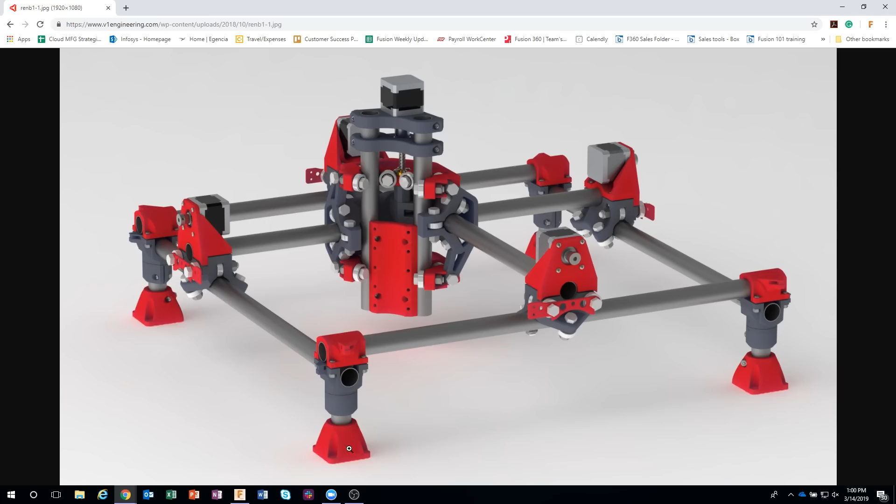We're going to be talking about lofting. I'm going to show you how I went about creating this part, which is actually from a mostly printed CNC machine. Let me bring up a picture of it. One of you on a previous live stream mentioned this, and I thought, okay, I've got to make one of these. So we're going to be creating one of these feet you can see in this image.

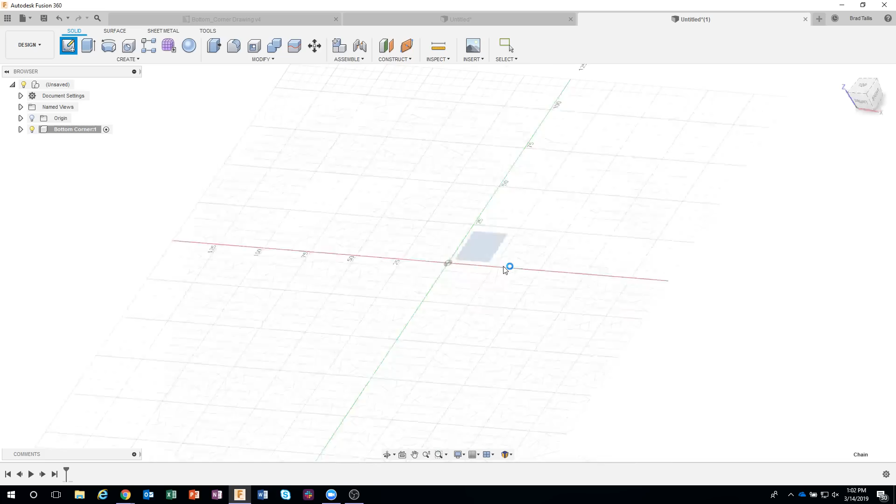Okay, then I'm going to start by creating a sketch, and I'm going to do the top plane. So I'm going to start by drawing my rectangle - I'll click on the rectangle command. If you don't know this already, it puts the options of the different kinds of rectangles over here in your sketch palette. For example, if I do C for circle, you'll see all the different kinds of circles. So R for rectangle - I can see my 2-point, 3-point, and center. I'm going to go ahead and do a center rectangle.

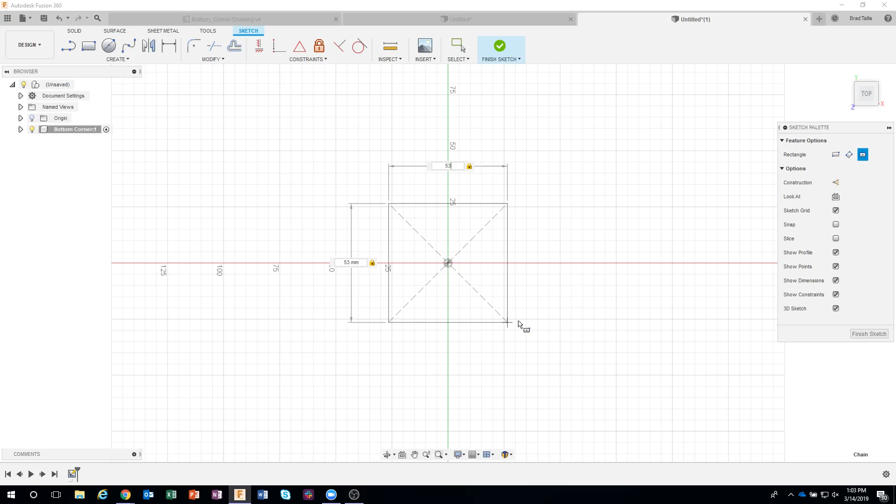Now all of the dimensions I'm typing in, I'm getting off of the drawing, and I'll switch back and forth between the drawing every once in a while. It says it's 53 millimeters square, so I'm going to type in 53 in both of those, and we can see it created a rectangle. Just for your reference, right here it says 53 with a little square icon, meaning it's 53 in both the horizontal and vertical dimension.

Now in a previous live stream, I mentioned that I keep my sketches fairly simple - for example, I don't do fillets in 2D, I do fillets in 3D. But in this case, we're actually going to be lofting from one profile to another, and I need my profile to look the way I want it to be before I do the loft command. So I am going to actually use the fillet command.

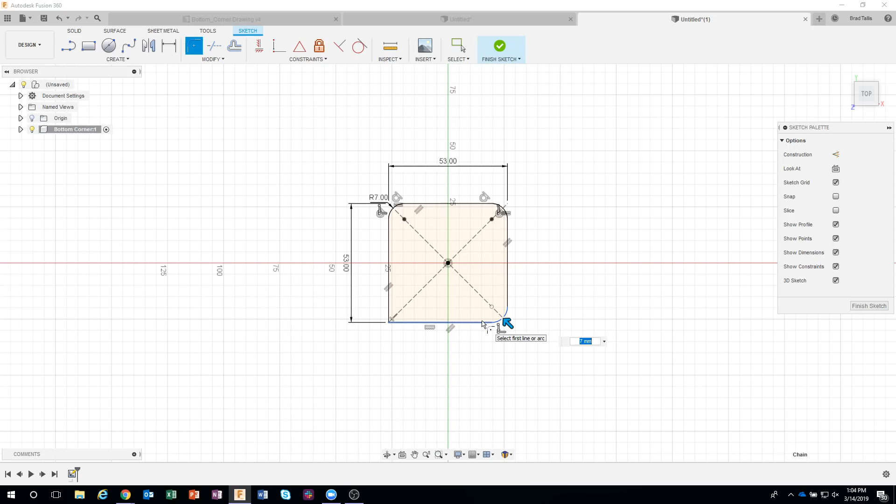So I'm going to say fillet, select my two lines, and the fillet according to the drawing is 7 millimeters. I'm just going to hold down my control key and continue clicking around - and of course I get a phone call. Let me go ahead and select these other lines here, so I'm doing a radius of 7 all the way around.

And now I'm done, I'm going to finish my sketch. So what we basically did there was we drew the overall shape of the bottom. You can see how it's a square bottom with filleted edges.

The next thing I want to do is draw the shape of the top, which in this case is just a simple circle, 35 millimeters in diameter. I'm not going to worry about the hole through the middle quite yet, we'll come back to that. I'm basically building the overall shape.

Okay, let me jump back to the drawing. I need to draw this circle at the correct height, and we can see the overall height is 40 millimeters. So I need to create a sketch that's 40 millimeters from my rectangle.

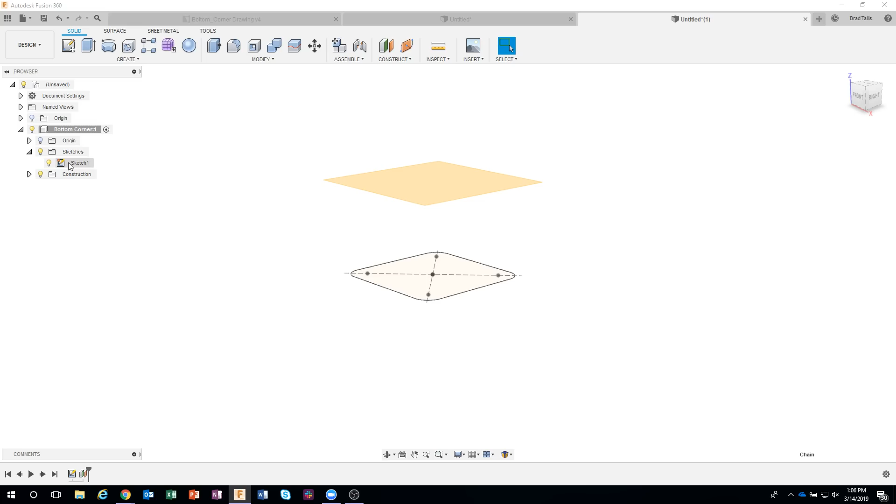To do that, we're going to use a construction plane, and the very first one is called offset plane. It allows me to pick a plane, and then I start to drag, and you can see how it's basically going to create another piece of paper that we're going to sketch on at a particular height. In this case I want it to be 40, so I type in 40 and say OK. If I expand open my component here, we can see our sketches, and we can see this construction.

So what's cool about this is I can just select that plane. I click on it once, right mouse click, and it shows me the commands that make sense. I could create a sketch on that plane, or I could offset another plane from that.

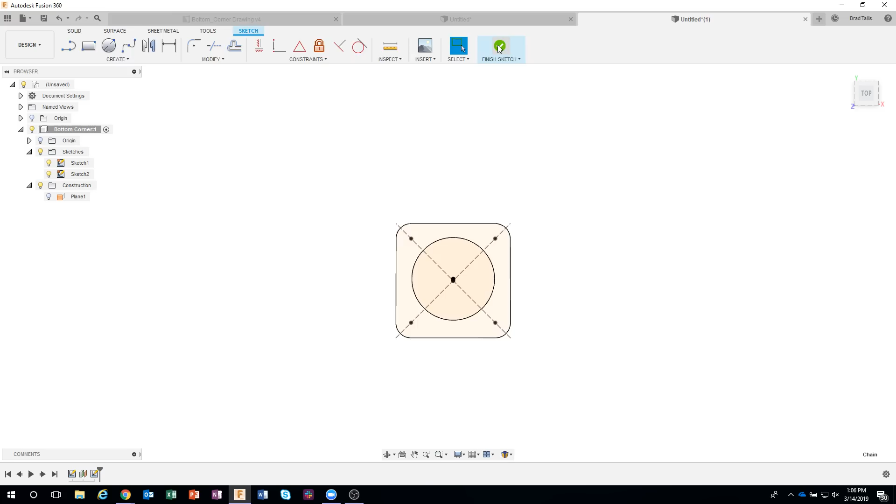But in this case, we're going to say create sketch, and I'm going to draw my circle. I started at the 0,0 because this is going to help me out. I'll just click there, and now I can type in my diameter of 35. If I say finish and rotate, we can see that circle is now above this other sketch.

Now I'm going to talk about the loft command, but you're going to see some issues happen, and we're going to come back and continue with our sketch. Under the create menu, I'm going to pick on loft.

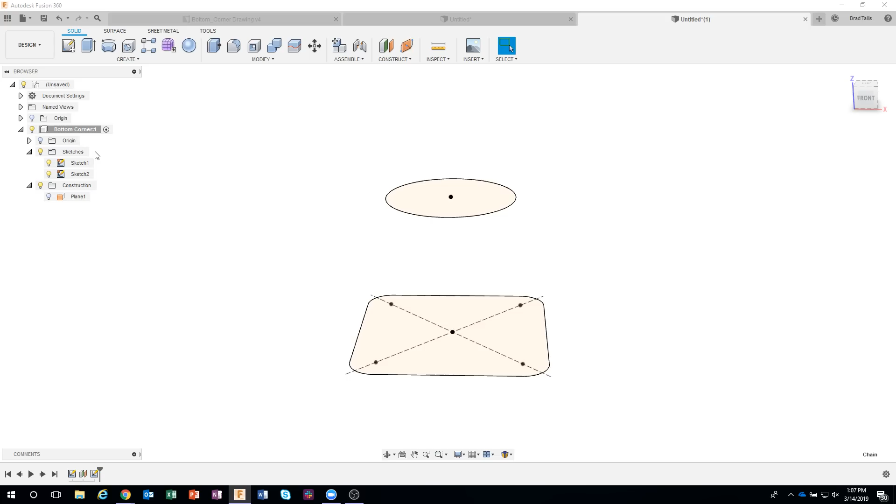What this allows you to do is to specify which profiles you want to loft. You'll notice as I get near this profile, it highlights. I'm going to click on that one, and then I'm going to click on this one. You can see that Fusion did what I wanted it to — it took this square shape with rounded corners and moved it up, or lofted it, to this circular shape.

Now, the problem with this is, if I look at it right from the front, it just went in a straight line. In our example, it's got a curve to it, we've got a nice transition, and in this case we don't see that. That's why we're going to actually have to add in some guide rails. This allows you to tell it to go from one shape to the other, but follow a rail — kind of like a train has to follow a train rail. The loft is going to have to follow that rail.

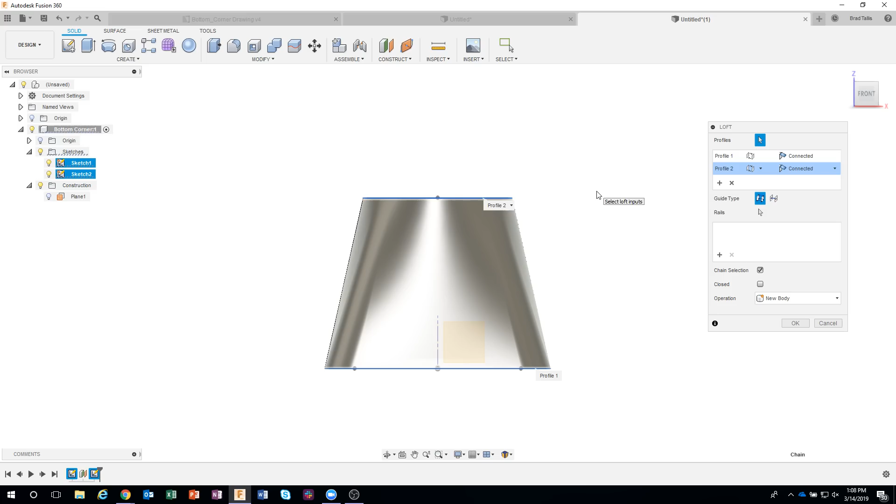Now I'm going to show you some cool commands in here. Up at the very top you can see the different profiles, and it says connected. But I can also say direction, and notice what we get — we're actually controlling the weight of this loft, so I can sort of simulate that curved surface. So if you don't really care too much about the exact shape of this, you just want it to go from one shape to another and kind of curve, you can use direction instead of connected.

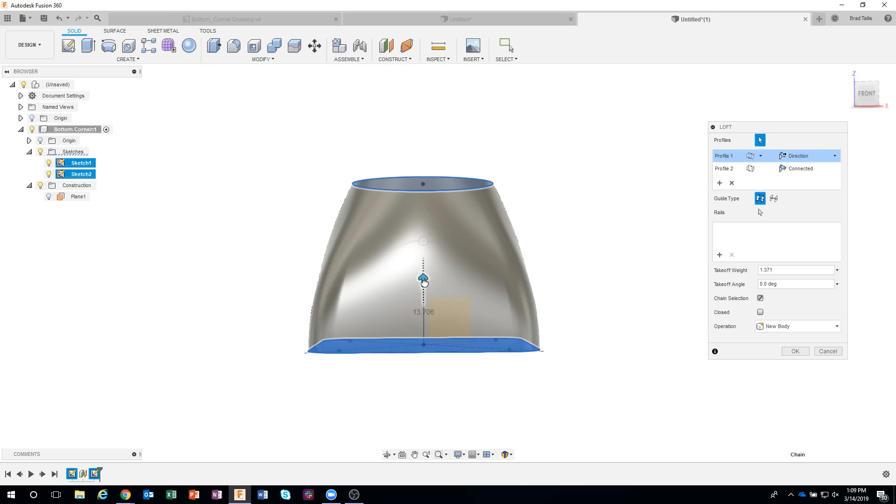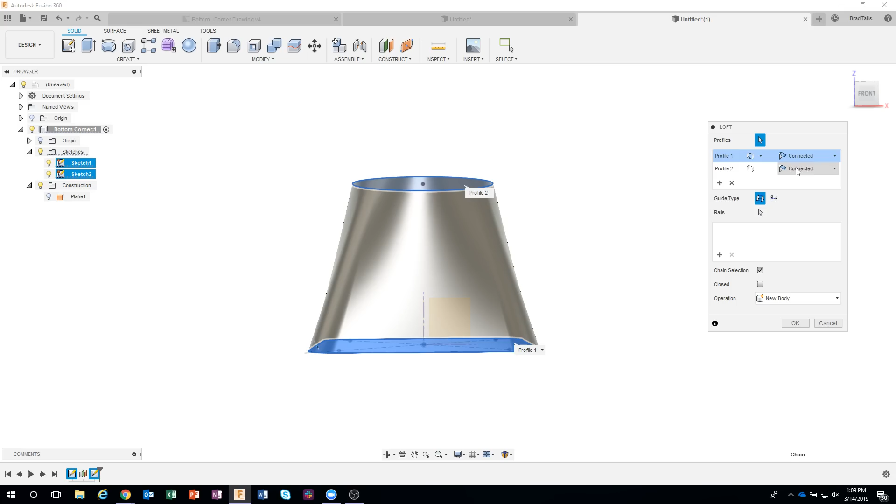Basically what you're doing here is specifying how tight the weight is. You can see it goes straight up for a long time before it finally starts to curve over, because we have a pretty strong weight right there. But if I bring that down, you can see how it curves a little bit smoother. I can do the same thing with a second profile — I'll say direction, and we get this, kind of the same result. You can see how we can change the weight of this and make it go from the square quickly to the circle. So that's what those options are.

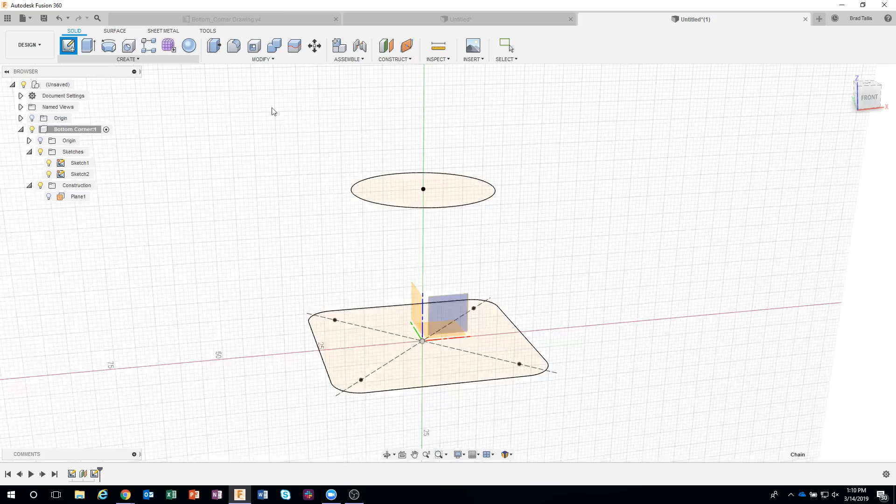Now in this case I'm going to leave it connected, and we can see that it's going to keep that straight edge, which is not what I want. So we're going to create some guide rails. I'm going to cancel out of here, and basically what I want to do is specify how they're going to loft up — what rail is it going to follow. So I'll go ahead and create another sketch, and let's just do it maybe on this front plane right here.

I'm going to use a spline for this. Now, if I get near this line, you'll notice it catches to the line, but it doesn't catch to the end point. I want to be very specific to catch to the end point of these. On this one it does, but on this one it doesn't.

So we're going to project some geometry. I'll come in here and say project, click on this edge here, and this edge here, and say OK. Now you can see those little round icons. What it basically did is project the very edge of this circle onto our piece of paper. If I turn it from the side, there you go.

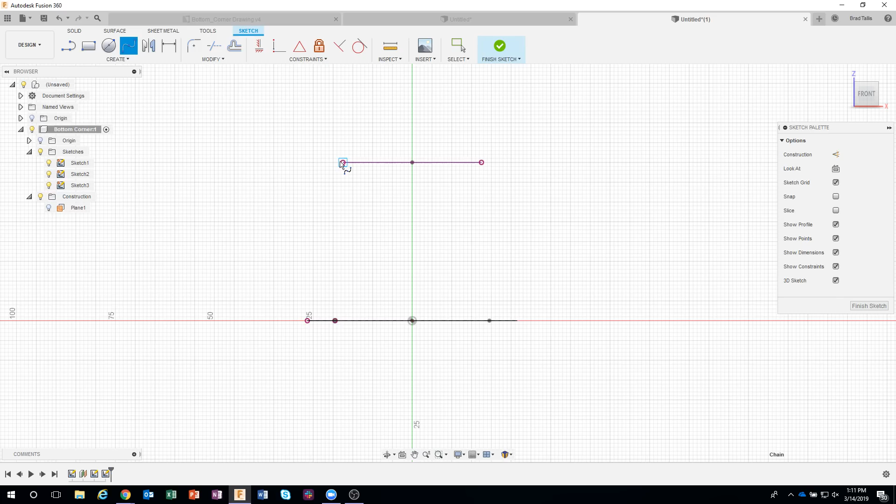So I projected this sketch information onto my new sketch. Now if I get near there, you can see how it's going to snap to that corner, and that's exactly what I want. I'll click one point there, another point here, and finally down here to define the curve. When I'm done, I'll click that little green checkbox. Let's zoom up a little bit.

You can see when you create a spline, it shows you the endpoints, which are these black dots. Then you also see these green lines, and these are our tangency weight and our tangency direction. Now, I want this to go basically straight up from this edge.

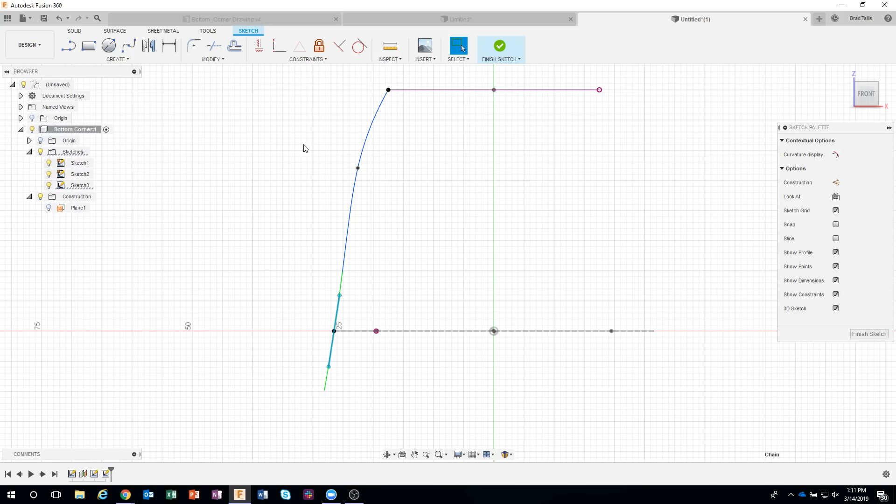I'm going to purposely make it kind of at an angle here. So I'll click on that tangency line and click on horizontal vertical. Now you can see that tangency line is straight up and down. That means the spline is going to come straight up and then start to curve.

So I have the shape the way I want. I could come in here and move this point around, tweak it a little bit. But I like the way it looks right now, actually. And I want this to be on the other side.

So I'm going to use the mirror command. It's asking for the object, but now it's asking for a mirror line. You'll notice I don't have a line that I could mirror around. If I did this one, it would kind of flip up. So I need to create one that's onto this, basically the vertical line here.

So let's go ahead and create a line. I'm just going to get near this center point here, and you can see it creates this snap guide. It's kind of hard to see, but there's a cyan line right there, basically saying I'm lined up perfectly with that point. I'll do the same thing here, coming up above and clicking. So basically we're going straight through the center of this part.

Now, I don't want this to be an actual object line, so I'm going to click on it and say construction.

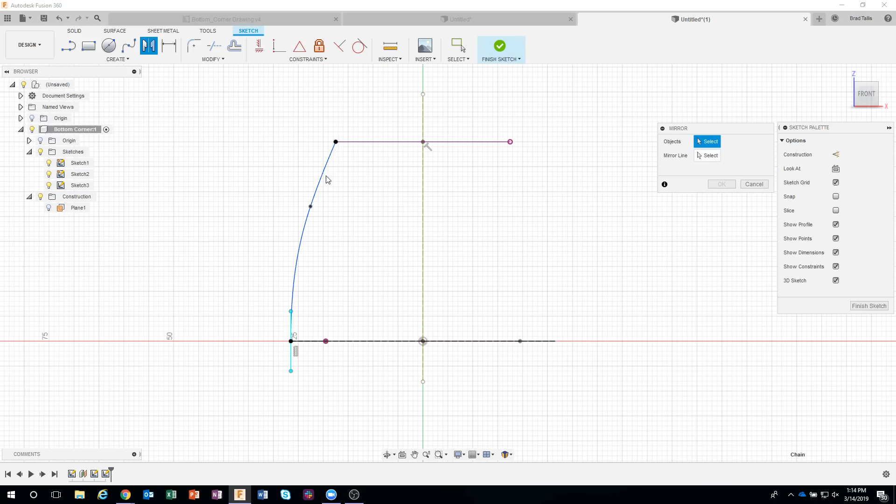Now I could come in and say mirror. What's the object? I'll say this line here. What's the mirror line? That guy there. We can see that sure enough it's going to mirror this across. I'll say OK, and you'll see all of the icons saying that they're basically a mirror of each other. I'm going to say finish my sketch, and we can see that we now have this guide curve on both sides of these circles.

Now I'm going to do the loft again and show you an issue. So I'm going to create a loft. What's the profiles? These two are my profiles, and we get that nice straight representation.

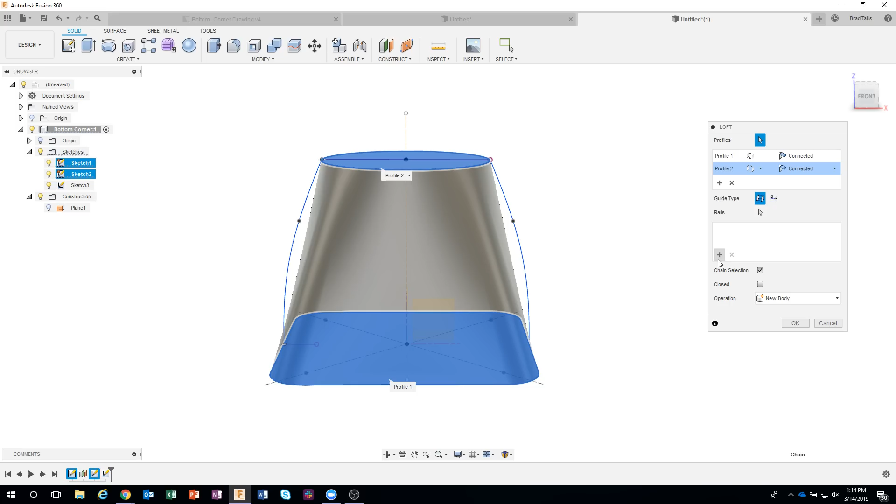But this time I can come in here and add a guide rail. I'm going to click on this curve right here and watch what happens. It's kind of interesting. Let me look at it right from the side here. So it's taking that shape and following it up this rail right here, and that's exactly what we want.

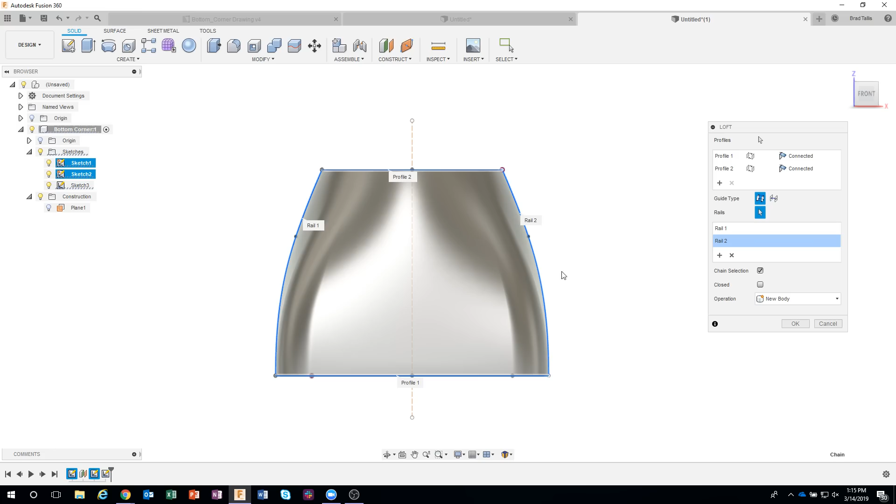But you'll notice this little kink right here, and that's because it's having to pull the profile over as it's lofting up. So you can add more than one rail. I'm going to add in that second rail, and we can see how it's going to follow that.

However, if we look at it from this side, it's more of a straight line. So when you're creating lofts and you want to follow a very specific profile or path, sometimes you might need to create a path on every single side. For example, 4 sides because of this square shape. Again, it depends on what you're creating.

If I was creating, for example, a whiskey bottle, it could be just a square base with a round top, and then I would just have one guide rail showing the side of the bottle. But in this case, I need to add in some more curves here.

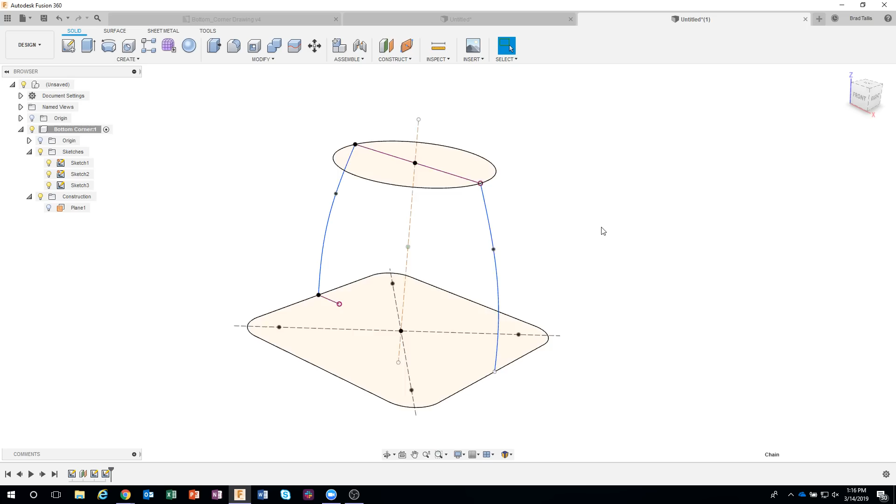Now here's a neat trick. I'm going to go back to my sketch, and I don't have any dimensions on this. I just went basically by the shape. Now it would be very difficult for me to recreate this spline on another sketch, because who knows where that point was, since I haven't dimensioned it.

So what I'm going to do is select these lines, right mouse click, and say copy. I can actually copy sketch entities. So I basically copied that into my clipboard.

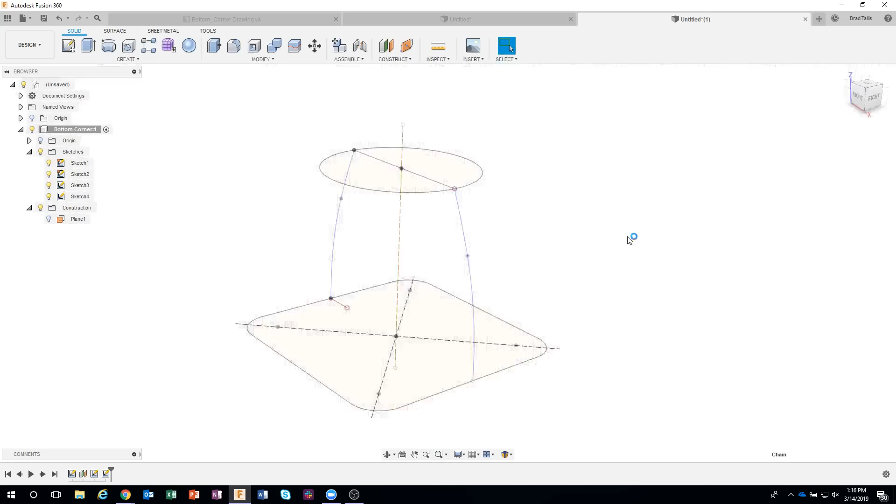Now I'm going to come in and create a new sketch. I'll say create a sketch on this front face here, or the side face I should say. And then I'm just going to right mouse click and say paste. Now in my case it came in kind of upside down for whatever reason, not sure why, but I can rotate it.

Now here's the catch. Notice where this little icon is, where it's going to allow me to rotate it, and it's going to rotate around that point. Well, I want this to be very precise, so I'm going to have it rotate around the center point because I know that's symmetrical. So I'll click on this set pivot, click on that point, and you can see how this little triad moved from over here to right here.

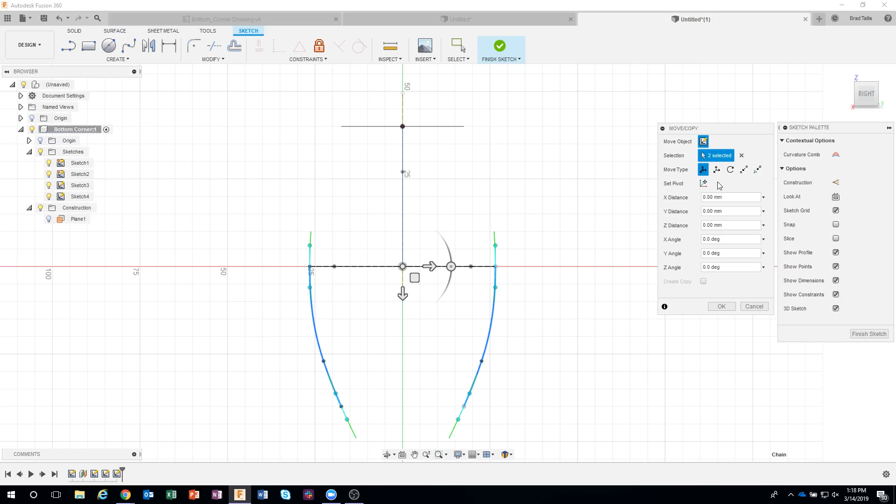Now, the one thing you have to remember is when you're done with that, you have to say, hey, I'm done, I've set my pivot. So I'm going to click on that checkbox, and you can see how it goes away. But now when I rotate, it's actually going to rotate around that middle point right there. And I'll rotate 180 degrees. I'll say OK, and we now have the exact lines all the way around.

So I'm going to go ahead and finish my sketch, and we can see how I was able to recreate it. I basically drew one of them and then mirrored it. Then I selected both of those, copied it, and pasted it onto a new sketch in a totally different orientation. So now I know that those are correct.

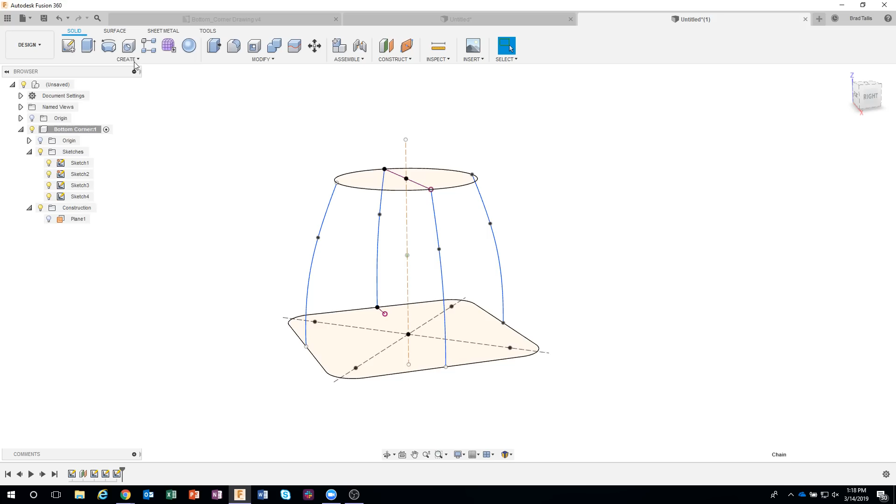So let's go ahead and do our loft. I'll say loft, our profiles. I'm going to add in some rails here, this one and that one. Let's rotate around, and sure enough we can see how if we hadn't added these, it wouldn't have matched. But now I can add that one and that one. I'll say OK, and I've just created a loft from a square shape to a circular shape.

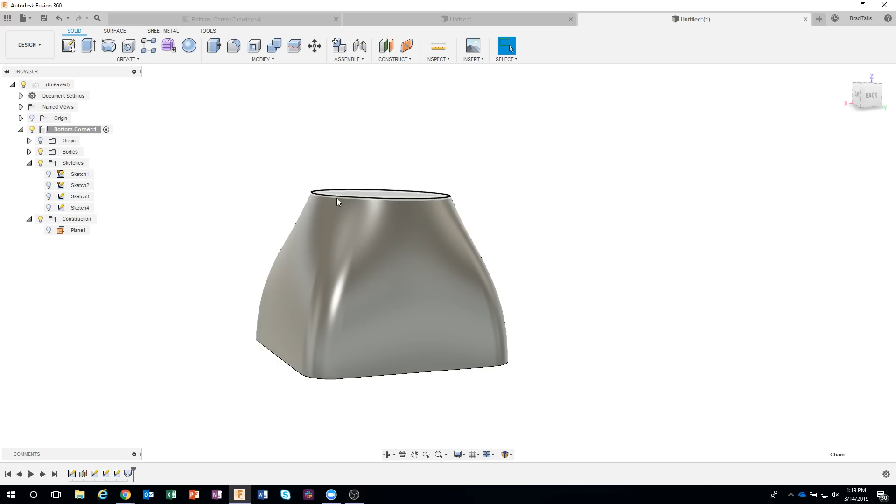Okay, and it's nice and smooth. You can kind of see how it's blending the fillet out into this large circular area here, so we get a really nice representation. In fact, I probably should have shown this at the beginning, but I've already 3D printed it, so we can see what the final product's going to look like.

And so now what we're going to do is start adding in some of the details, like the holes and the slots, etc.

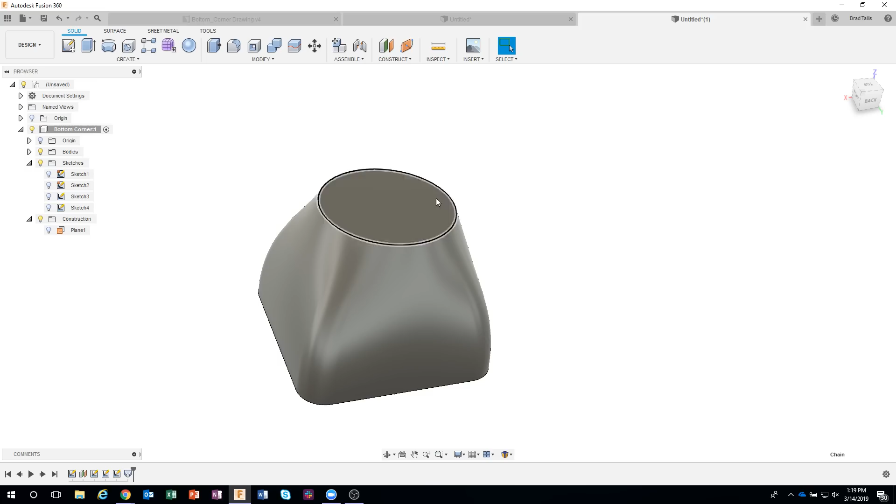Okay, so the next thing I might do is put the major stuff on first. There's a big hole that kind of goes through the middle of this, so let's create a sketch on that top face using the circle command. And again, because I started at the origin, everything is symmetric off of this, so I can select that middle point. This is 23.5, according to the drawing.

Now, in some of my previous live streams I've talked about sketching, and I've gotten questions in the chat and follow-up emails where people ask, do you sketch everything on one plane and do a complex sketch, or do you do multiple sketches? I personally like to do multiple sketches, and we might run into a situation in this example, and I'll show you why I like to do the multiple sketches.

So I could have put this circle on my original sketch that was on the bottom and then extruded it up, but I don't know, I kind of like to keep these separate sketches so that way I can go back and find them easier.

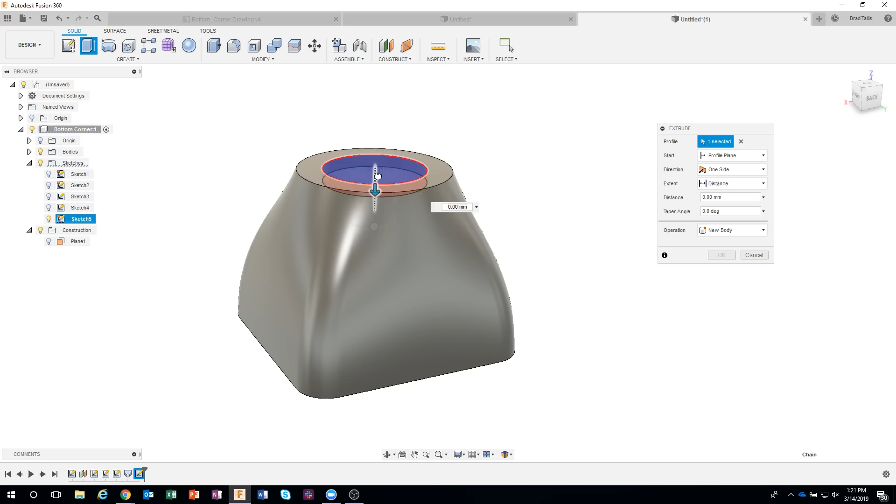So I'm going to select this and say extrude, and start to drag down. Now here's a neat trick, okay? How far do I need to go? Well, according to the drawing, it's 40, right? So I could type in -40, or I could just hover over this face right here, and you'll see that it says snap to -40. So if I were to click on that face right there, I don't even have to rotate. It actually knows you're trying to go to a planar face, and you'll see that it will snap to that -40.

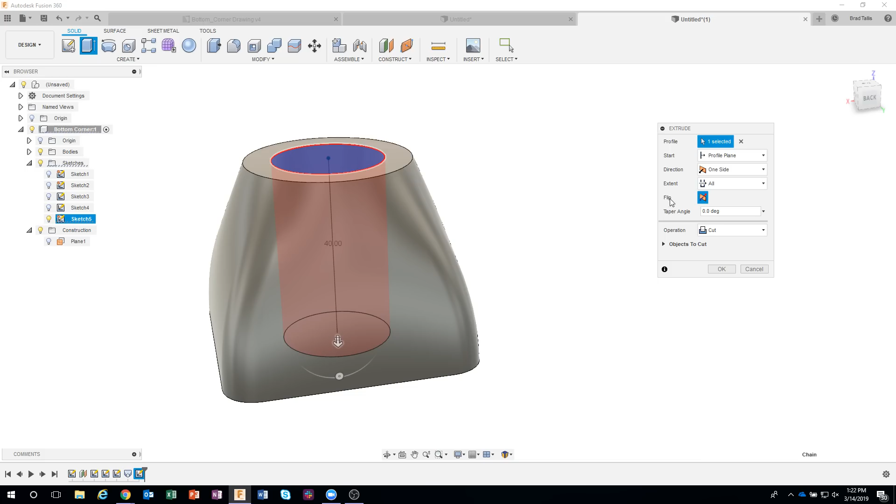Or what I like to do is, instead of saying distance, I like to change it to all, and that's going to go through all of the part. What's nice about this is, if I were to come back and change this in any manner, like change the height, it's always going to go all the way through the part. Whereas if I had said only go 40, and then we added 5 more millimeters down here, it wouldn't have gone all the way through. So this is another tip, I personally recommend selecting all, and there you can see how it's going to go all the way through.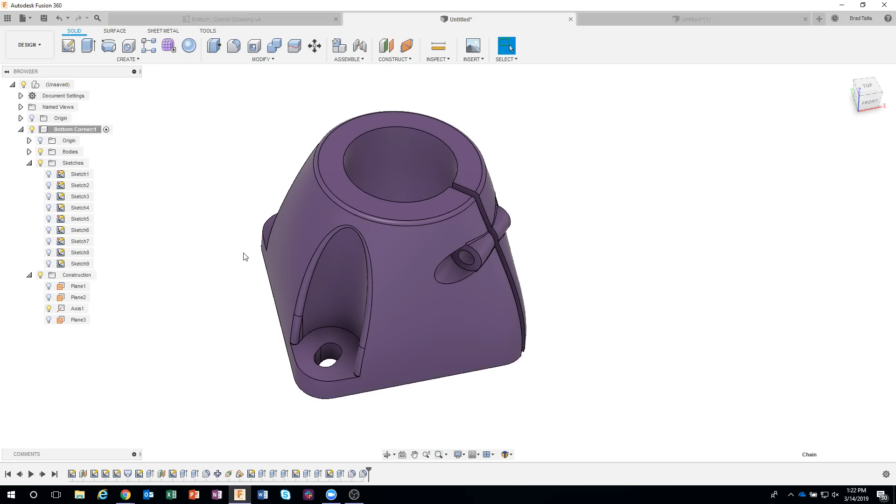Okay, the next thing I want to do now is maybe start working on the slot feature right here. So according to the drawing, that slot sits on a shelf about 5.5 millimeters up from the bottom.

So again, we're going to use an offset plane. I'll come in here and say offset plane, grab that bottom face, and we're going to drag up a little bit, -5.5. And it just created a plane that's exactly 5.5 millimeters from the bottom of the part.

Okay, let's go ahead and sketch on here. I'm just going to draw basically one of these. So again, using the drawing, I'm just grabbing some dimensions off of the drawing, but I want to be very precise. I want to be exactly in this corner. So again, I'm going to create some geometry that's going to help me out.

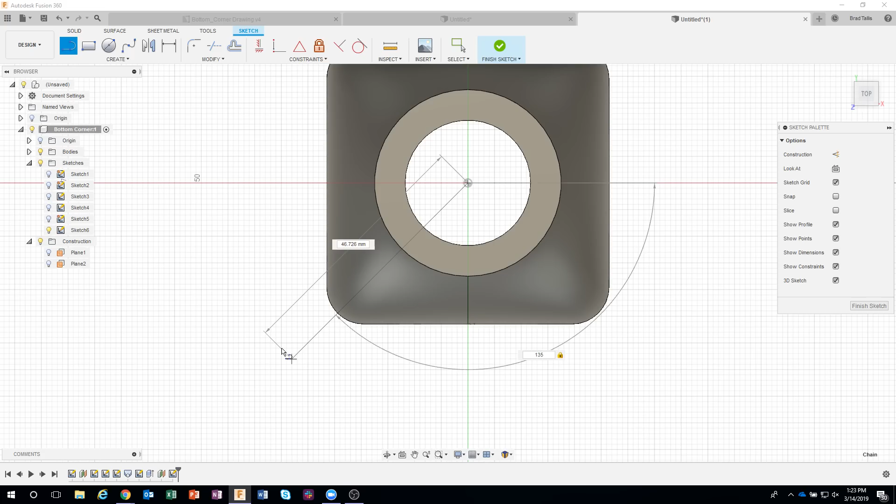So I'm going to just start with a line, and I want that to be at 135 degrees. I don't care how long the line is, I just wanted to make sure I'm basically 45 degrees from the center. Again, I can select on it and click on this little construction icon right here, and it turns it into a construction line instead of an actual object line.

Okay, then I'll come in and start creating my slot, and I'm going to do a center to center slot. I'll just get kind of near this edge here, click and click. I know the overall diameter is 4.85.

I purposely created this a little bit larger than it needs to be in length. The diameter is correct, I got that off the drawing. Now I can come in and start to tie this thing down.

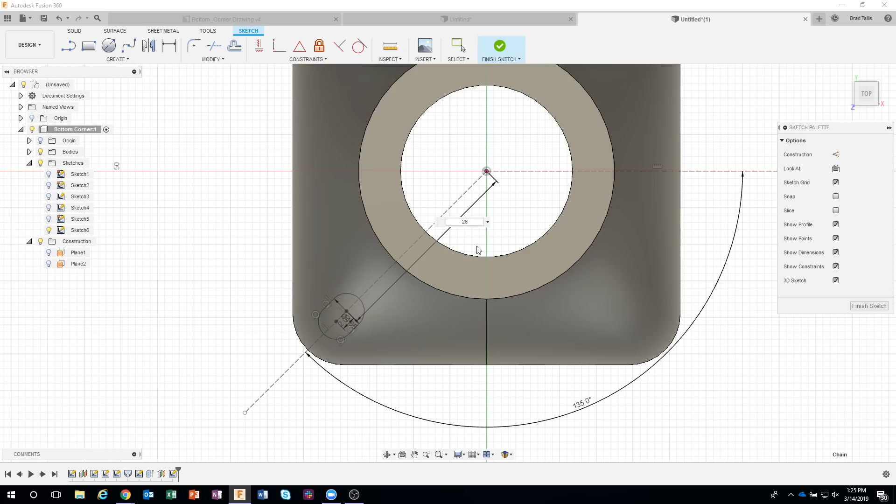For example, I know the distance between these 2 points, so I'll go ahead and place my dimension: 2 millimeters. We can see how this slot got smaller. And I also know that from here to here is 26 millimeters - I need my glasses, it printed out pretty small. So you'll see how it moved that slot into the correct location.

So again, I just kind of get it on the line where I want it. I don't really care about what size it is. Then I can come back and start to tie it down with some dimensions. There's also a larger slot that kind of goes around that.

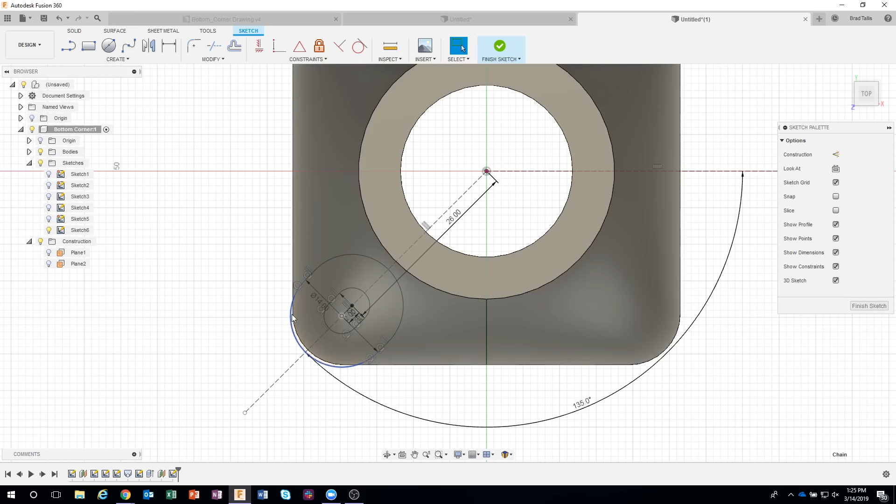So I'm going to do the slot command again, center to center, and now I know I can click those 2 points. In this case the diameter, according to the drawing, is 14, and I'll show you where I got this from. There we go - we can actually see that this overhangs slightly, but that's actually how it's designed.

So how did I do this? Basically I used this detail view right here. We could see that it's spaced 2 millimeters apart, the diameter of the slot is 4.85, and the diameter of the larger slot is 14. And we can see that it's 26 millimeters from the center of the circle. So that's where I got that information from.

So I'm only going to do one of these. I'm actually done with my sketch. Okay, so let's take a look at this. I want to extrude this smaller slot all the way through the part.

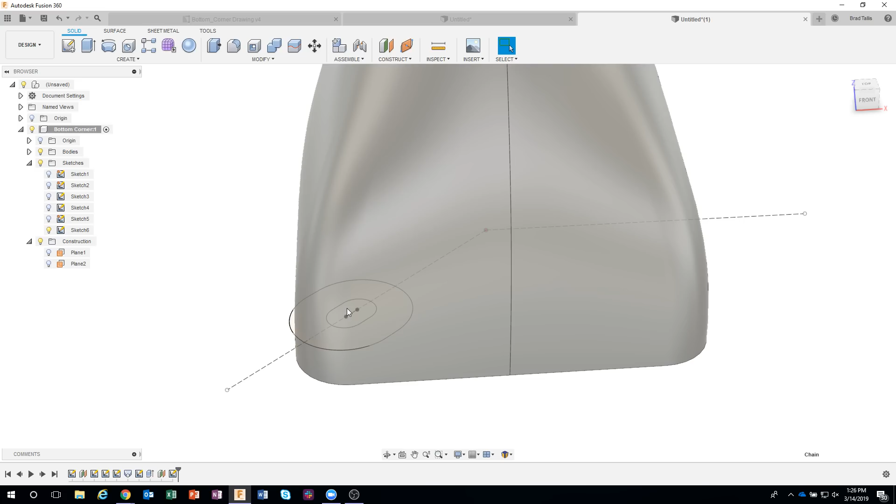I'm going to go ahead and try to click on it, and you'll notice it's kind of buried by my part, so it's trying to grab this front face first. I've shown this tip a couple times now, but I use it all the time - I absolutely love it. If you click and hold for about a second, you'll see it allows you to kind of probe through: the very front face, then it's almost like a laser shooting through it, hitting the front face, then the profile, then the bottom face. So all I have to do is click and hold with my left mouse button for about a second. I'm going to grab that profile.

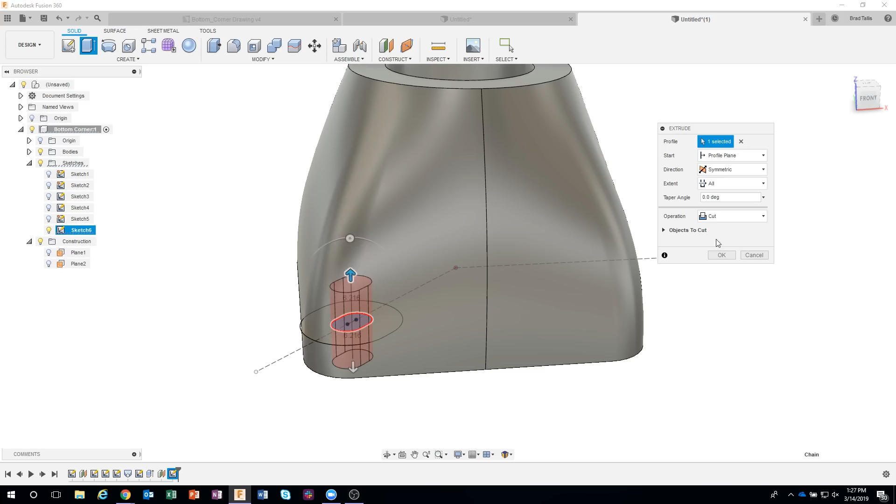I'm going to right mouse click because all of the commands that make sense are at my right mouse click, so we can see I could extrude this. I'm going to say extrude, and I'm going to start to drag. Now I want it to go through both, so I'm going to say symmetric, and instead of distance I'm going to say all. Notice what it does - it goes a certain distance in one direction and a certain distance in the other direction to go all the way through. So that 'all' option is a very handy command. And obviously we want to cut, so I'll say OK.

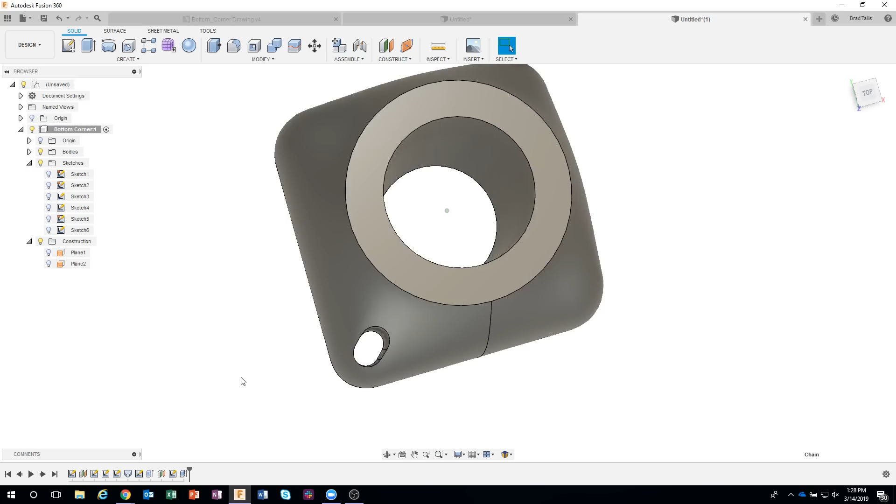We just created that slot that goes all the way through our part. Now you'll notice my sketch disappeared, but it's very easy to come back in here and turn that back on. In fact, I usually have my sketches and construction folders kind of unfolded so I can see and get in there very quickly.

Okay, so now I want to do the same thing with this larger slot. I'm going to click and hold and pick on the profile. I'm also going to select this inside profile here, so I'm basically saying I want to remove all of this material. Now I don't have to do that, but just for me personally, it's confirming that I'm going to be cutting everything away.

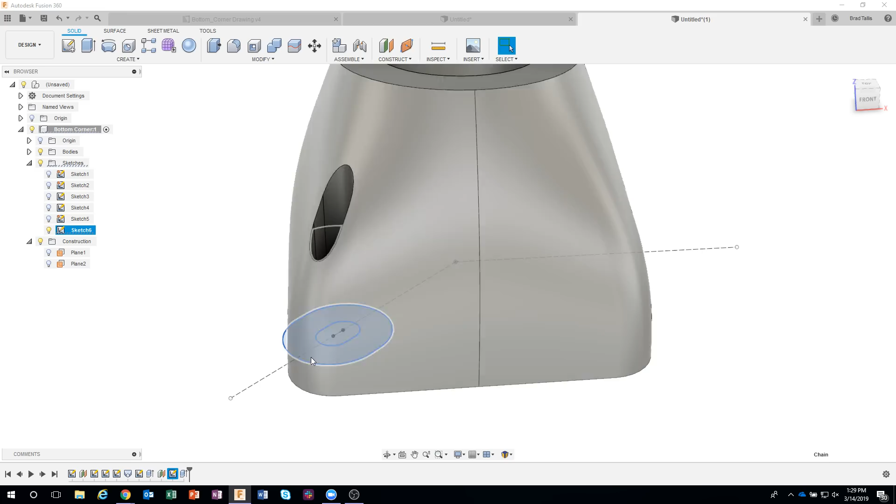For example, what if our extrude had a 1 degree taper or something like that? It would create these weird sliver faces. But in this case, I'm saying remove this whole region, this whole area, all at the same time. So I'll right mouse click and say extrude, and start to drag. We can visually see that sure enough, that's going to cut some material away. How far? Let's just say all again, and it figures out how far it needs to go all the way through the part. And I'll say okay - sure enough, it removed all of that geometry.

I'll turn off my sketch, and we can see that we got that kind of neat little pocket area. Now, I only did one of these, and I actually want to pattern these around, but I'm actually going to add in a small fillet first.

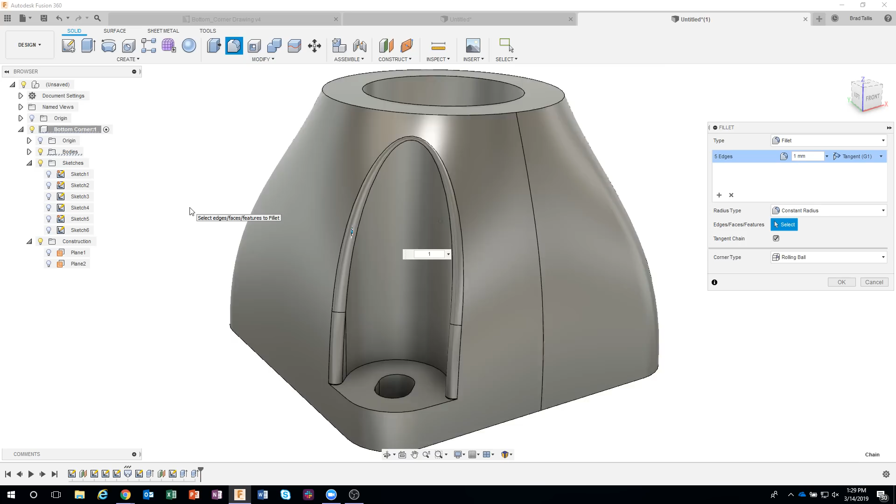So let's go ahead and say fillet. Make sure I want tangent chain - I'm just going to grab that edge there. According to the drawing, it says all fillets are 1 millimeter unless otherwise specified, so I'm going to type in 1 millimeter and say OK.

Now you might be saying, well, I've watched some of your previous live streams, Brad, and you've said save your fillets till the end, do the major stuff first and then the minor stuff at the end. But what you're going to see here is we're actually going to pattern not faces, but features. So we're going to pattern the slot, the big huge extrude, and the fillet all at the same time.

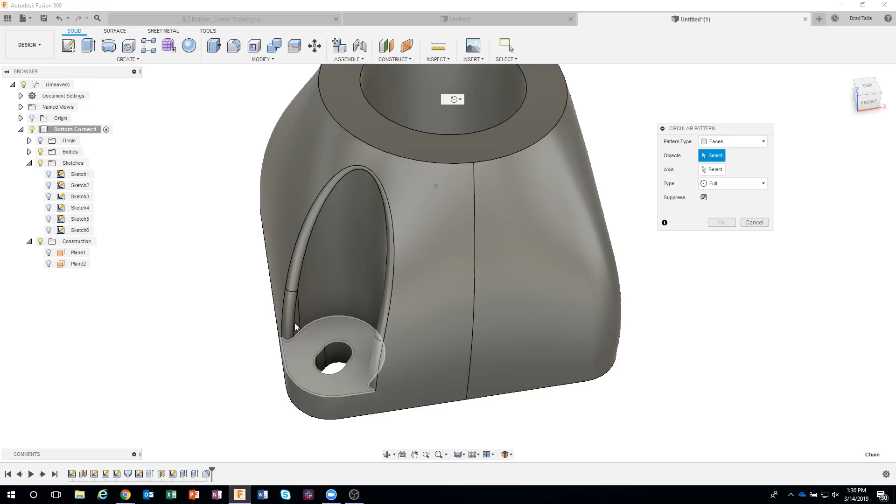So it's going to save us some time in the long run. Check this out, I now have my finished corner here. I can come in and say create a pattern, and I want to do a circular pattern. Right here you'll see by default it's usually set to faces, and I could have come in and selected all of these faces, but I run the risk of missing one or making a mistake.

So I typically like to pattern features, and features are what's in your timeline. For example, I could pattern the fillet, I could pattern that big extrude, and I could pattern the small slot all at the same time. So I actually selected all 3 of these features. In fact, you see it says 3 selected.

What's the axis? We'll select this cylinder as the axis, and it gives us a preview. By default it's set to 3. Now I want to change this to 4. So I'm going to up that to 4, and now you can see how it's going to go in the corners.

However, according to our part here, you'll notice that there is not one in this corner where the slot is. So we're actually going to only have 3, but there's an option in here called suppress, and you'll notice it's checked, and all of these have a little checkbox next to them. So I can come in here and uncheck one of these. We're still patterning 4 quantity, but we're only going to display 3 of them. I'll say OK.

And very quickly, we created these little slot pockets all the way around the part, except for over here where we're going to do the nut and bolt where it kind of connects. So that is why I actually did the fillet before I did the pattern, so we were actually able to pattern that fillet feature also. Kind of handy.

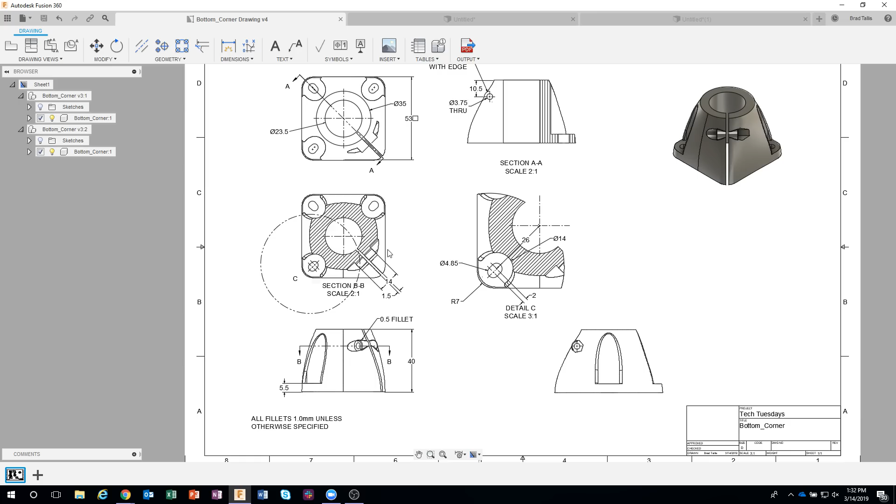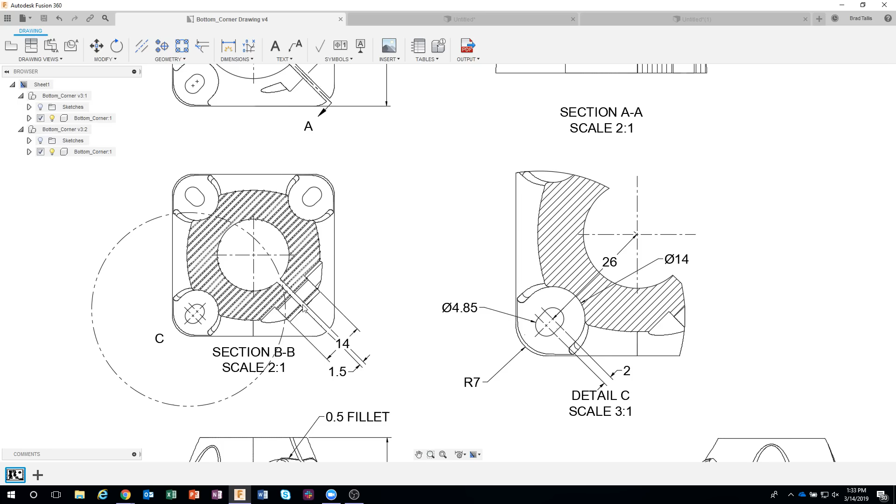The next thing I want to do is create basically this region right here. So a screw is going to go through there and be tightened down by a nut, and it's going to pinch onto some circular tubing. So we can kind of see that it's going to be about 14 millimeters wide, and we can see in the drawing that the hole that goes through is 3.75.

Now, what's going to be interesting is I put a dimension here that says 7 millimeter radius, coincident with edge, but I also threw a dimension here, and this will make more sense once we get creating this. But I want this hole to be in a very specific location, but I also want it to be coincident with this edge here.

So let's go ahead and take a look, and if I turn on my origin, we'll see that I don't have a plane that's in the correct direction. I need to be going across here somewhere. Okay, so I want to be able to create a plane.

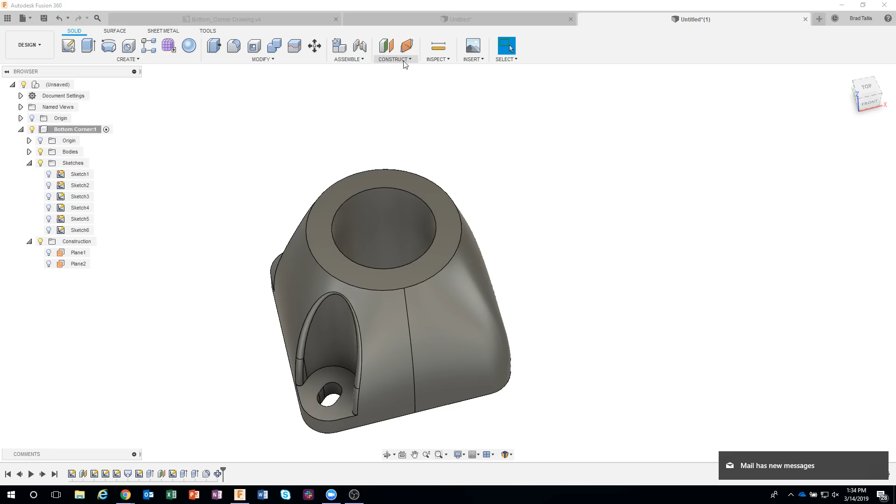So I'm going to come in here and say plane at an angle, but this requires through an edge or an axis. Okay, so I'm going to come in here and say axis through a cylinder. So I'll go ahead and click on that cylinder, and you can see how I'll put a line down through there. I'll go ahead and say OK.

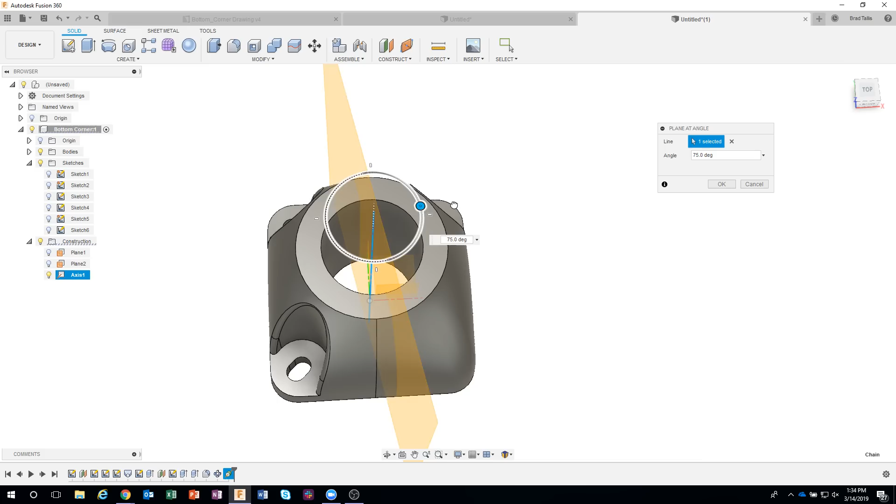Now I have a line that I can select plane at an angle. Notice how it's asking for a line. I can click on this line, and sure enough, it's going to put a plane through that line, but I can specify what the angle is. So you can see how we can rotate this plane. And let's just go 45 degrees.

So we're now slicing through our part at 45 degrees, and that's exactly what I want to do here. I'll go ahead and create a sketch. And you can kind of see our part looks a little bit different because we're looking at it kind of in an orthographic direction.

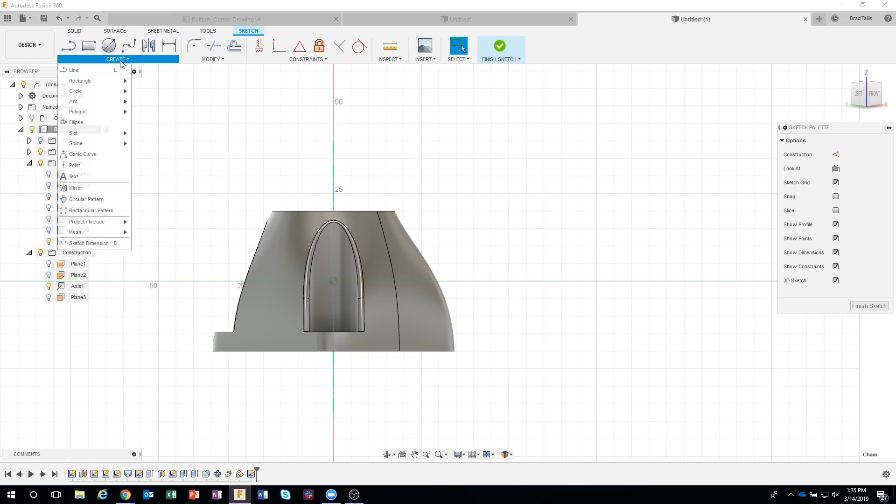Now here's another tip. I want to project some geometry, so I'll say project, and I want to project this curve right here. But you'll notice when I click on it, it actually does not project that edge. It projected the top and the bottom and some other geometry, but not that edge, and that's because of the direction we're facing here.

So I'm going to undo and show you: instead of project here, we're going to say intersect. Let me show you before I do that what's going to happen. This piece of paper is slicing through our part right here, and I want to come in and say project, intersect.

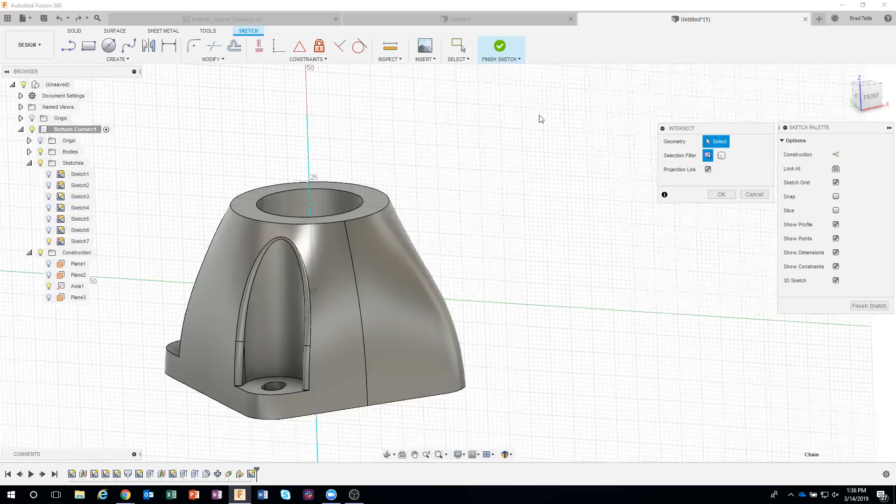Notice here it's asking for some geometry, so I'll click on this geometry, and you can even see the preview there—it's going to project whatever's intersecting through that plane. Now it did create that edge, because I used project intersect. Very handy command. Most people use project, which works in a lot of situations, but in this case intersect is actually quite useful.

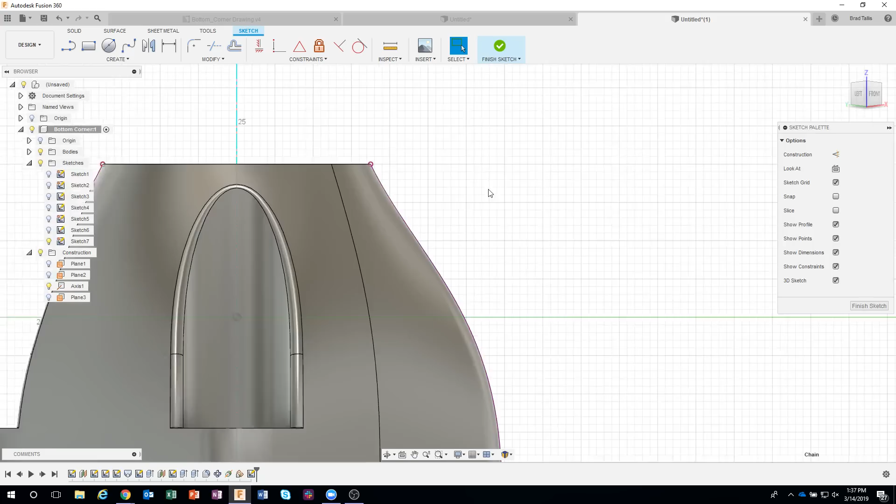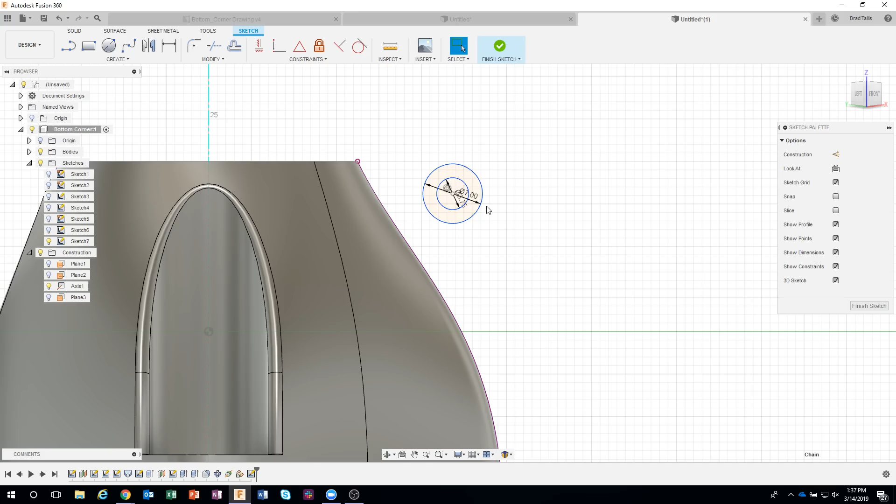Okay, let's look at it straight on. I'm going to draw my circle here, just out in space, and then drag it into location. I know this is 3.75, and there's a larger circle that goes around it, and it is 7. Then I'll just get this sort of where I want it to go, something like this.

Now I gave a measurement of 10.5 down, but I also want it to be coincident. So what I'm going to do is create a point. You'll notice I can create a point on this line, so I'll click somewhere on that line, and that point is now on that line. Then I can come in and say I want my circles and that point to be horizontal with each other.

Now watch what happens—when I drag this point, you can see how the circles are staying in line with that point, and my point is staying on that edge, which is kind of handy. Then the last thing is I want this to be coincident with that point. So I'll come in here and say coincident, that, and there we go. So basically we know this circle is cutting through this edge, and it's in line horizontally—this is like the center of the circle on the edge, that's what's happening here.

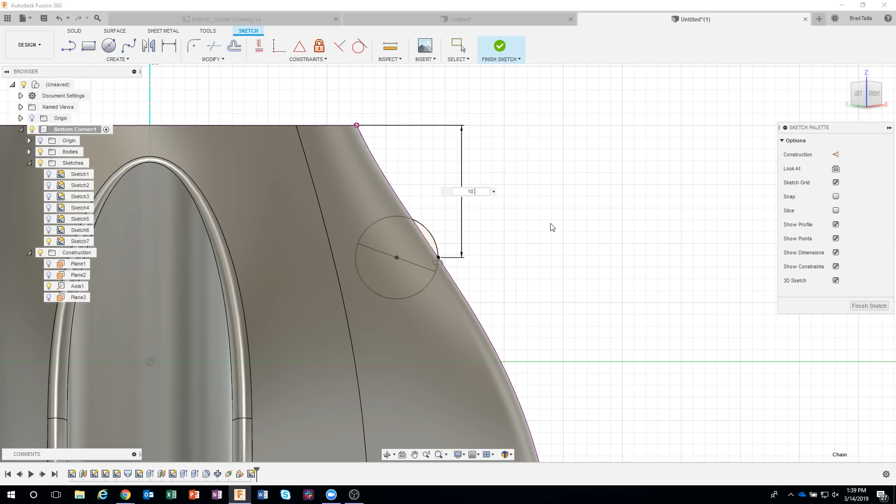So let's go ahead and throw our dimension on here. I'll say from that edge to that point, and that needs to be 10.5. Watch what happens—that point slides up the edge a little bit, but it still is coincident, so I know my circle is exactly where I want it to be. That was a lot of information, but basically I want this little tiny bulge right here, and I want it perfectly lined up 10.5 from the top.

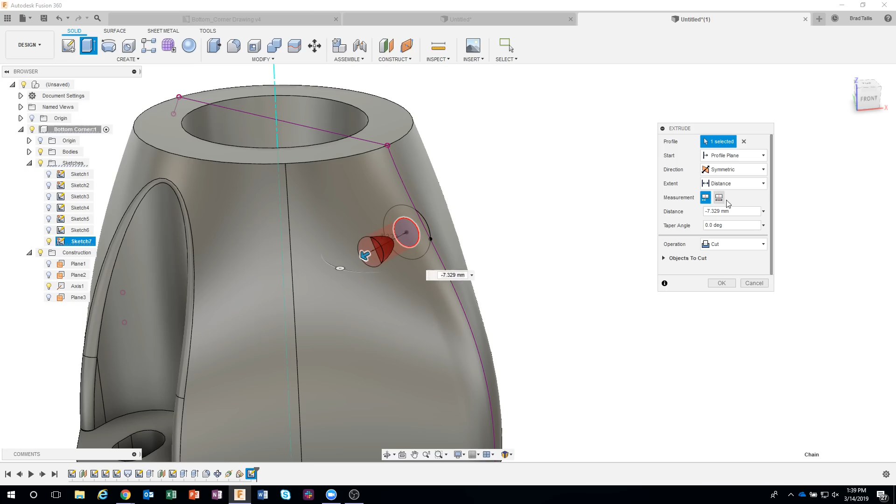Okay, so I now have my sketch. Again, things are buried, so I'll just click and hold, and we can probe through and grab that profile, and I want to extrude that profile. I'll say symmetrically through all—we can see how that's going to extrude or cut through our part. I'll say okay. My sketch went away, but again, just hit the little light bulb right next to it.

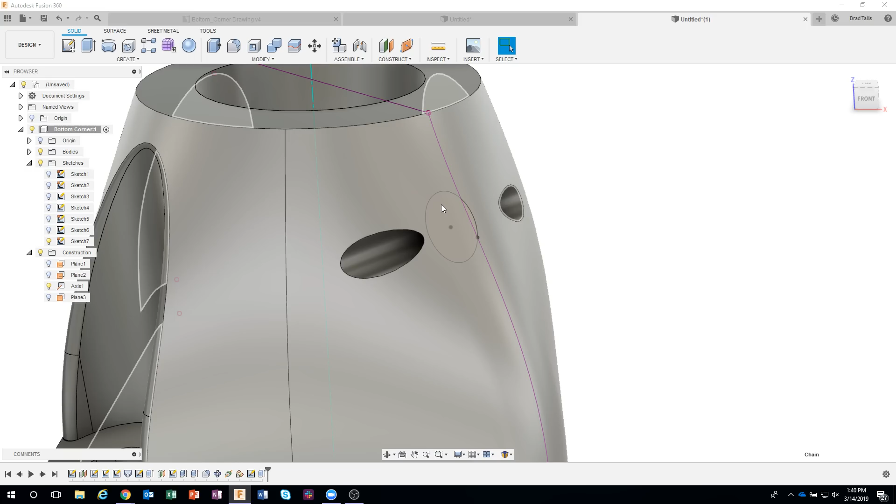And now I want to start creating a little bit more stuff to be removed. So I'm going to click and hold this profile, and I'll grab this profile here also—make sure I grab both of those. I'll say extrude.

Again, I'm going to slice through. Now notice this is an object line, and here's a catch — it did not grab all of my profile. I only grabbed a little part of it. I need to grab that guy also. Let's go all in this case, and say okay.

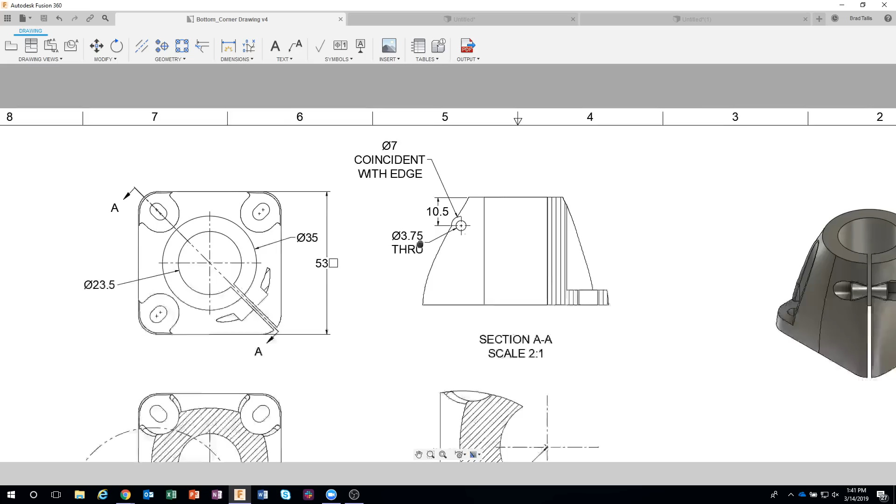So I'm basically building half of this, and it's going to be hard to see, but I'll show it over here. We're slicing through a round profile on one side, and then creating a recess for a nut to get trapped in there. You can kind of see it in this preview. So we're going to put the head of the bolt through here and then the nut over here, and it's going to help keep it from turning.

So I'm going to basically build half of this at a time. I use that profile to machine through, and I grab the larger profile to give me that bigger recess. Then finally I want to add in this section here to give it some meat to bolt against. So let's do that again.

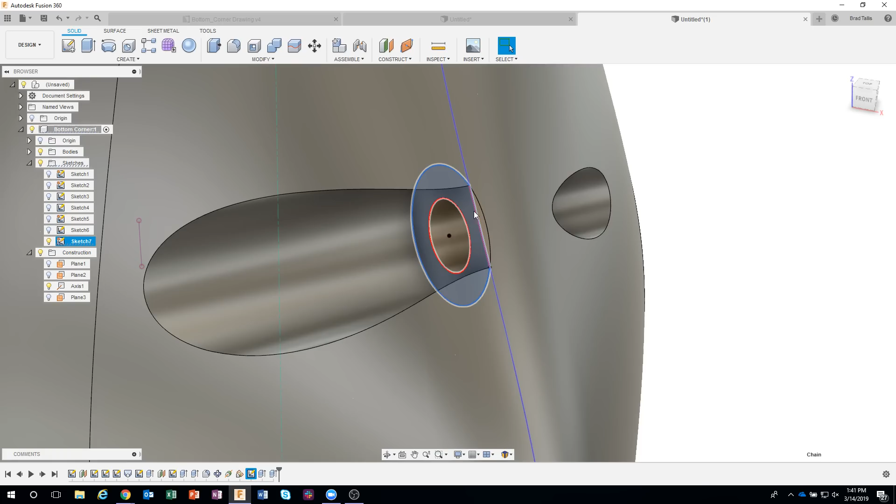I'll come in here and grab these two profiles. I'll say extrude, and let's go to the left. According to the drawing, it's 7 millimeters, so it's 14 total. I'm going to come in here and just say 7 millimeters, like so, and say okay. So I've created that side.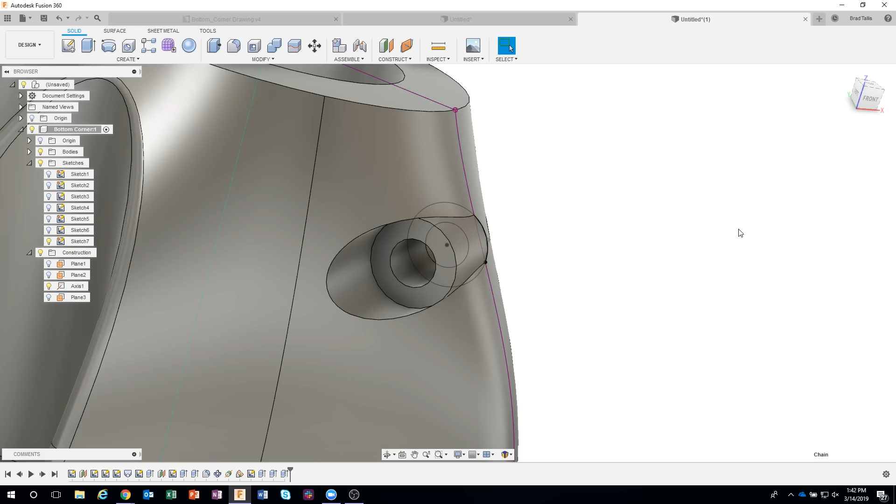Now this side over here, I want to do that hexagon shape. What I'm about to show you is what I mentioned earlier, where I said I like to do multiple sketches because sometimes you might not get the results you'd expect. Instead of doing one complex sketch, I like to do multiple sketches, and what I'm about to show you is the exact reason why.

Okay, so I have a sketch right here, and I'm going to say edit sketch because I want to add some more stuff to it. So I say edit sketch, and notice what happened — my hole has gone away. Now why is that? Well, that's because the sketch is way back here in time.

So I'm down in my timeline. You can see there were 3 steps after this sketch, so it's not showing me those 3 things. And I personally like to see what my part looks like. Okay, so let me show you what I mean.

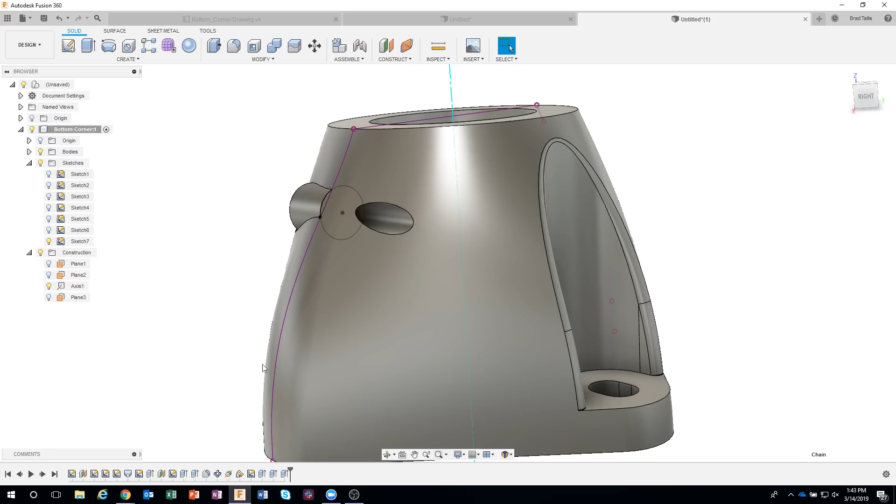As soon as I say finish sketch, I see all of this information. So because I came back and edited this sketch, it's not going to show the downstream features that happened after that sketch, because we've gone back in time, right? Okay, so how do we get around that?

Well, I can just come in here and say let's create a sketch on that face. That sketch is now created after this other stuff, and now I can visually see everything. Again, this is personal preference, but I kind of like to see what's going on here.

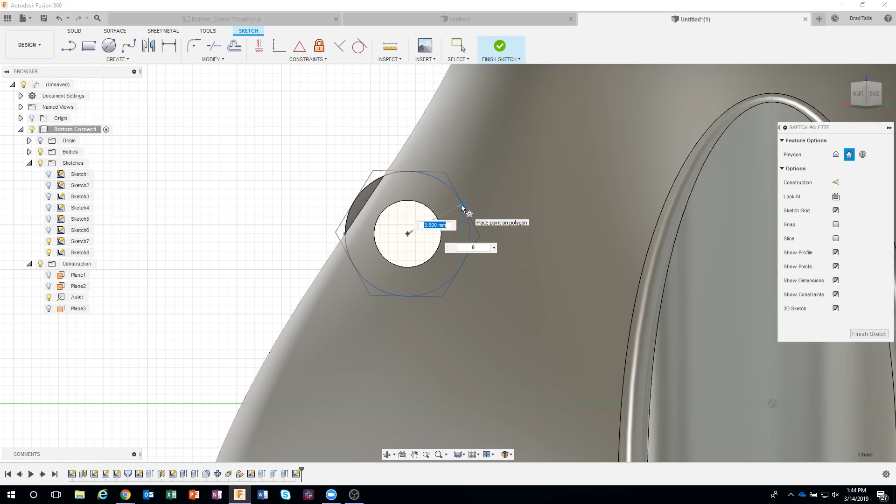So now I can come in, say polygon, and I'm going to do a circumscribed polygon. I'll click here — I just have to get near this edge right here for the correct diameter. I'm just going to go ahead and click and finish my sketch. Okay.

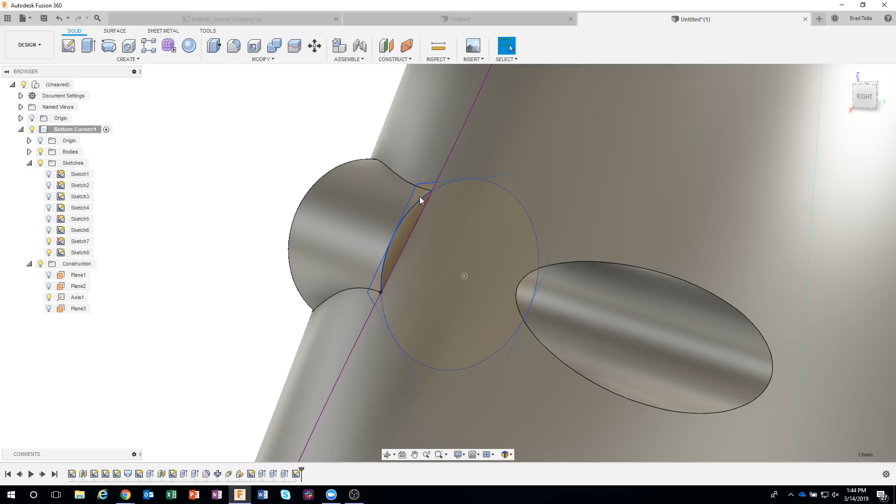Now I can go ahead and notice also, because this is on a separate sketch, it's not bringing in this circle for me. So it would have split this into multiple little sections — another reason why I like to do multiple sketches instead of one complex sketch.

So let's go ahead and extrude this guy. Actually, you know what, I'm going to do a neat trick here — I apologize, I'm getting ahead of myself. What I'm about to show you I think is really, really handy, and I haven't shown this in previous live streams: how you can actually extrude from an offset.

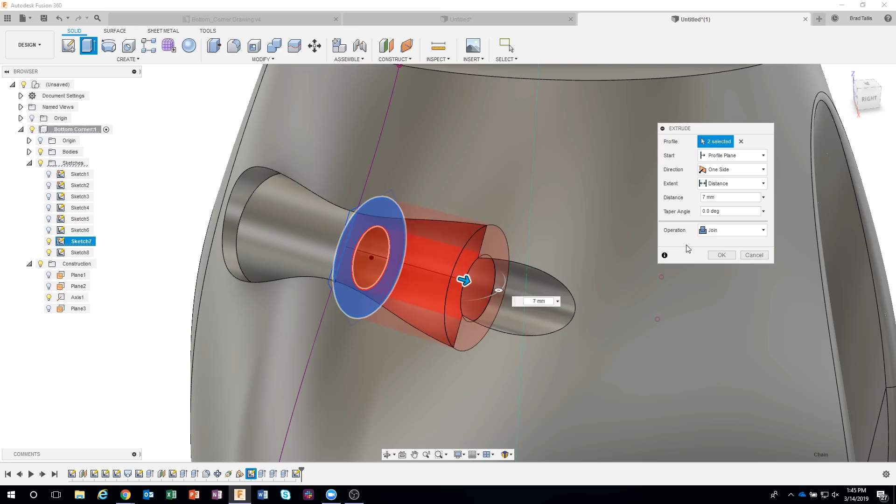So check this out. I'm going to extrude this circular profile first of all. I'm going to click and hold to grab that profile and this profile here, and we're going to extrude that 7 millimeters, just like we did on this other side. I'll type in 7, and instead of cut, we want to join. Now the interesting thing here is my hexagon shape is way back here — we're going to figure that out in just a second. But I've now created this main shape.

Now I want to extrude my hexagon profile, but it's kind of in the wrong location. But check this out — I'm going to say extrude, and I'm going to start to drag. Okay.

And I'll change this to all, and you'll see that it'll slice all the way through, but I don't want it to destroy this whole region right here that I just created. So that's where this start comes into play. You can see it says it's going to start from the profile right there. Or I could say offset. How far do we want to offset? 7 millimeters. So what it's doing is it's using this profile, but offsetting 7 millimeters and then doing the extrude.

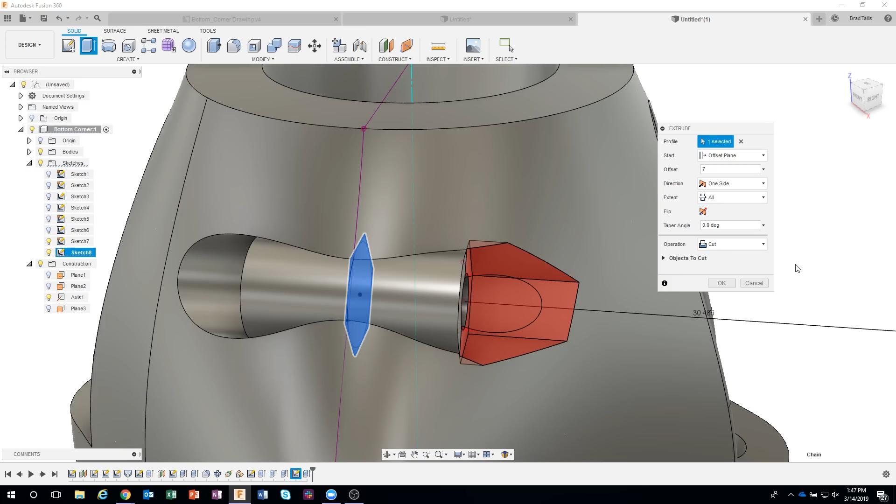This is a really cool trick. I don't know if I've shown this before, but it allows you to, instead of having to create another sketch on another face, have a more complex sketch right here and then offset it 7 millimeters and do your extrude. I'll say okay, and we end up with this particular shape, which is exactly what I was looking for.

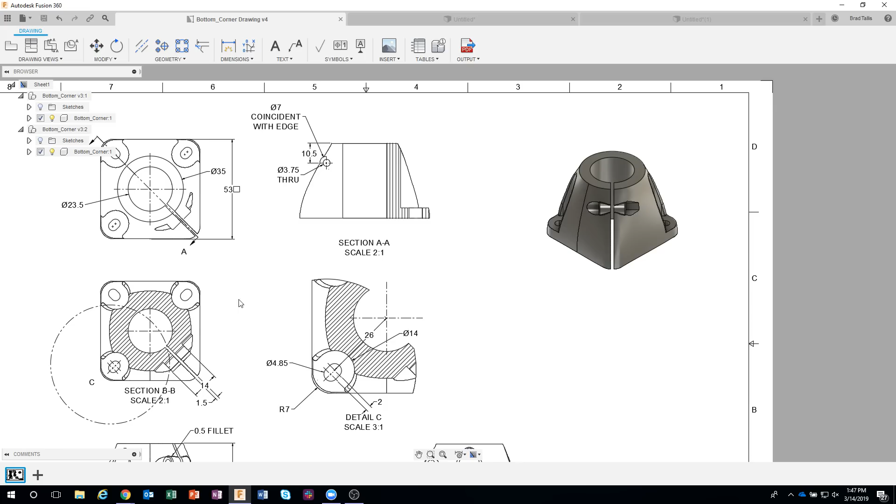So the last thing we need to do for this part is create the slot that goes through it, because it basically gets pinched together around some circular pipe. We can see that slot is 1.5 wide. So I'll jump over here - remember we created that plane on this axis? I'm just going to turn it back on again. It's still there, we can still use it. So I'm going to click on it, right mouse click, and say create a sketch.

Now, what shape do I need this to be? Well, it can be as simple as a rectangle. So for example, I'm just going to get near the center line here and do a big shape like that.

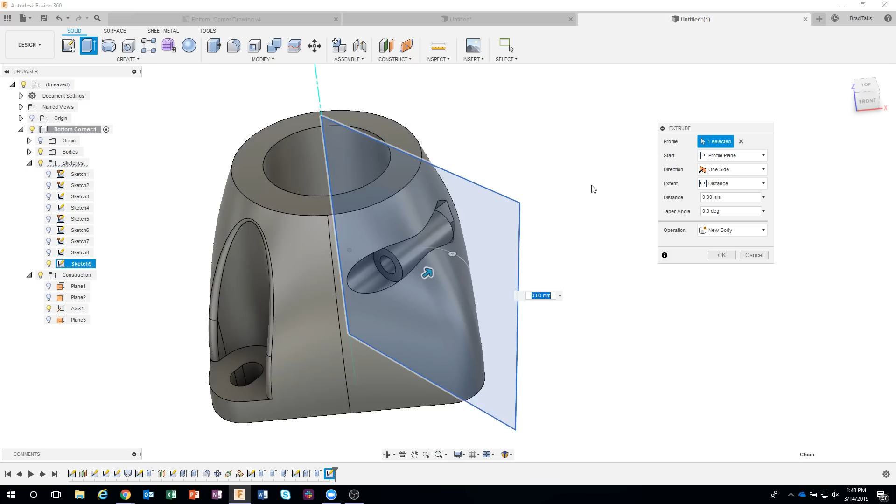We'll click on it, we'll say extrude. Now I want to go symmetric in both directions, so I'm going to say symmetric. I know that the overall length, the whole length, is 1.5. When you change to symmetric, it gives you this measurement option of half length or whole length. Right now it's set at half length. If I typed in 1.5, this is actually 3 millimeters, right? Because it's going 1.5 in one direction and 1.5 in the other direction. However, if I change it to whole length, you can see how that got smaller, and now it's 1.5 for the whole length.

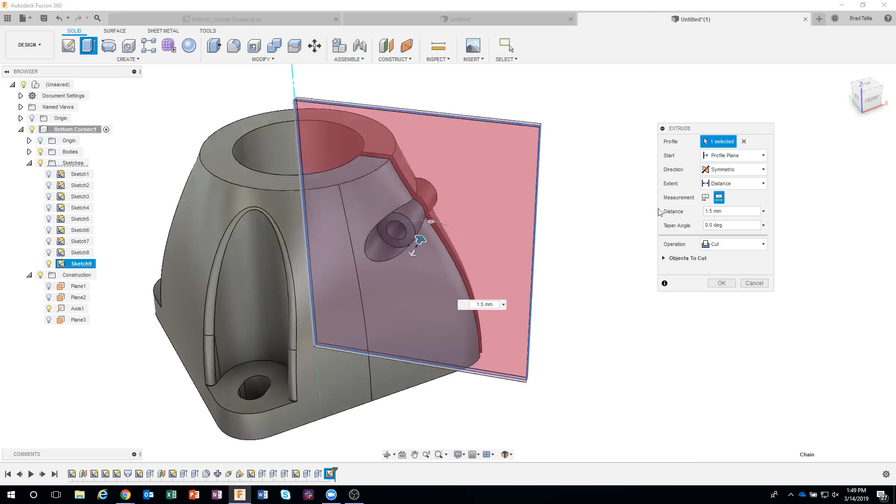But notice how simple of a profile we used, right? We're just trying to create a slot through there, so I just used a rectangle. I'll say okay. And we're pretty much done.

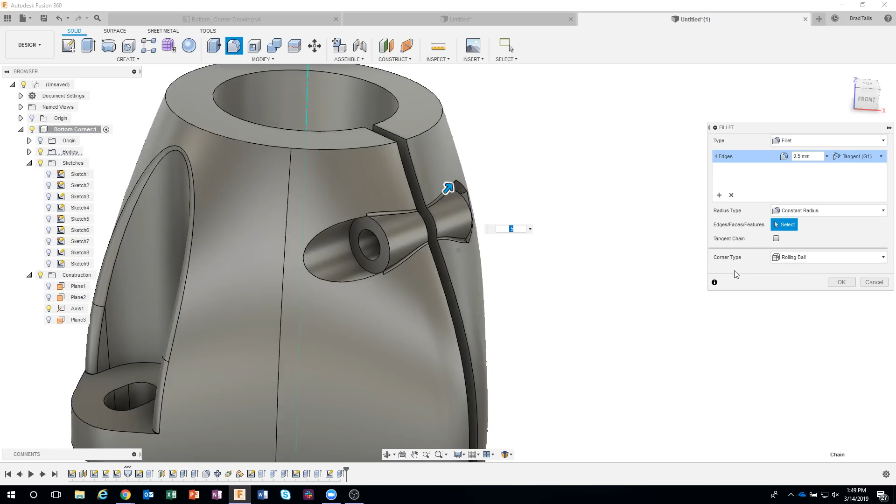The last thing, if you want to, I could come in here and say fillet, for example. Now these are 0.5. So I'm just going to grab a couple of these edges to help smooth the transition from this part to the surface there or whatever. And I could put a fillet on this top edge here if I wanted to - 1 millimeter fillet, type in 1. And it'll blend on the top. I'll say okay.

And there we are, there's my finished part. Not an overly complex timeline, but we used the Loft command to create that shape going from a square to a circle.

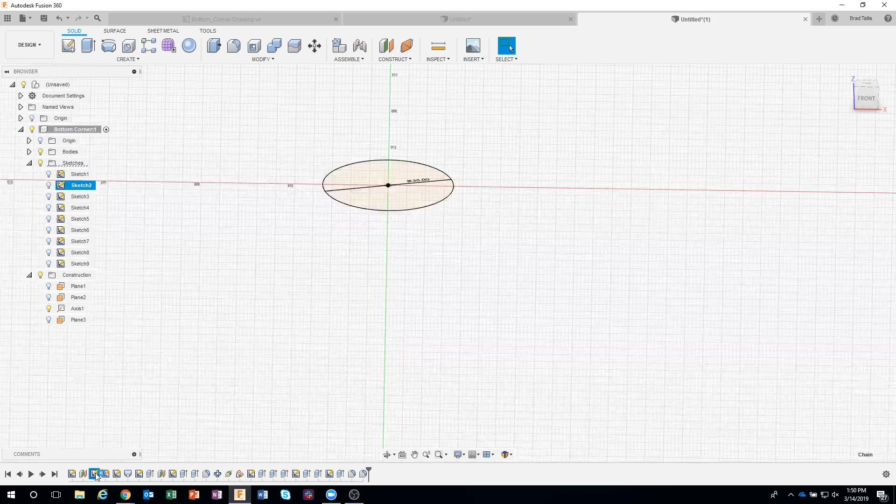Okay, I'm going to point out a couple really quick things here. Let me jump into one of these sketches. Something we just added, and I've seen this requested in previous live streams - they wish they could turn off dimensions. Well, guess what, now you can actually turn off your dimensions. Let me find a more interesting sketch - yeah, for example, this guy here. Let's turn off the body so you can see what's going on. I can come in here and turn off my constraints, and I can turn off my dimensions. So it really cleans things up.

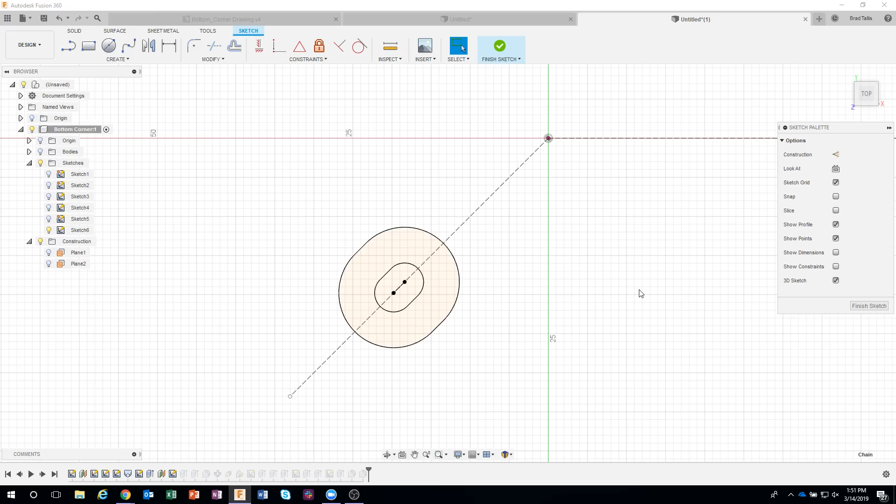I don't know if you've watched Aaron's video where he talks about what's new in the latest release, but if you haven't, I highly recommend you go watch that. I hope he's already linked to it because there's some really cool stuff in that video. I'm actually going to be highlighting some of that in upcoming live streams.